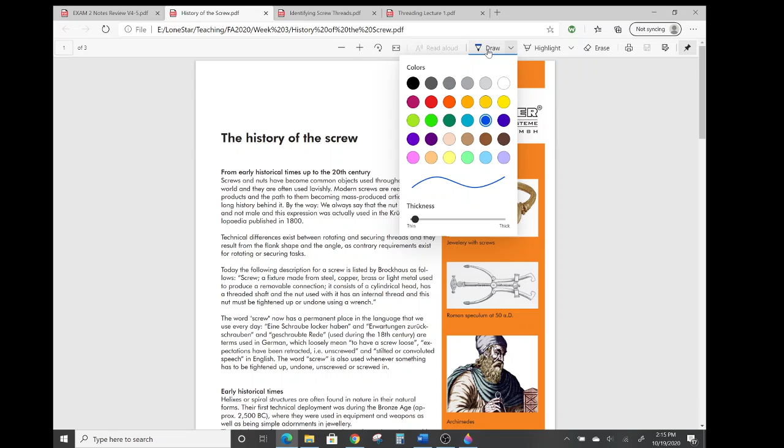Alright, so the history of the screw. The history of the screw. So I get my cursor over here, and as always we're going to want to draw on this, and I'll use red unless somebody starts complaining about red.

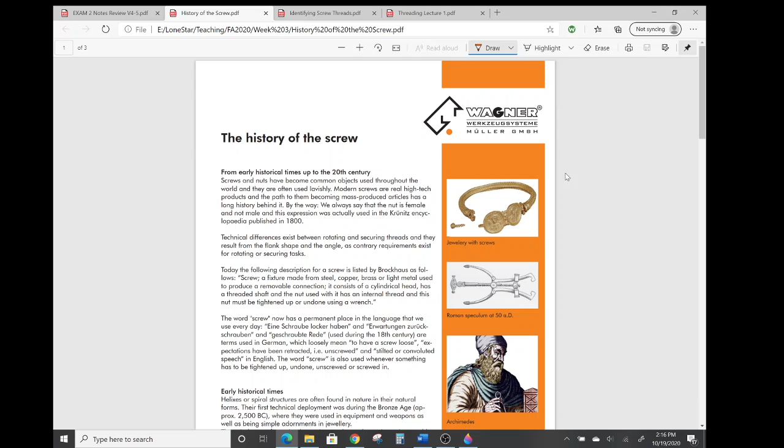Alright, from the early historical times to the 20th century, screws have been around for a long time. Here's some examples. Here's some ancient jewelry.

This is a Roman speculum. It was a medical device. Still use speculums today. Gynecologists use them. OBGYNs used to yank the babies out with a speculum. I don't think they use those anymore.

But this was one from the Roman time of 50 AD. The word cesarean section comes from Caesar, from ancient Rome, where they would open up the belly of a pregnant woman who was having trouble getting the child through the birth canal, and they didn't have a lot of anesthesia back then. So imagine that was an interesting trip. And you could bite down on a piece of leather or a stick or something.

But anyway, here's Archimedes. Now Archimedes is, he did a lot of work with screws. Archimedes is like Euclid. The Archimedean screw. Here's a screw pump right here. We use screw pumps still today.

When I was a civil engineer, I installed and designed a lot of screw pumps for lifting large volumes of water over a short distance in height. The Texas City Dike used to have huge screw pumps to take the storm water from one side of the dike and throw it over into the bay.

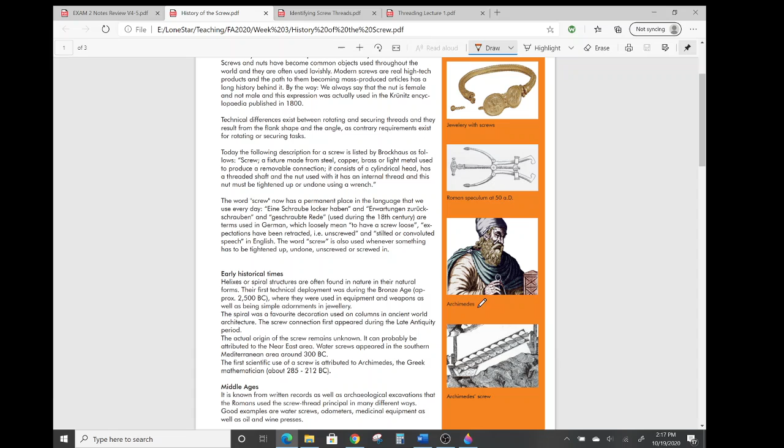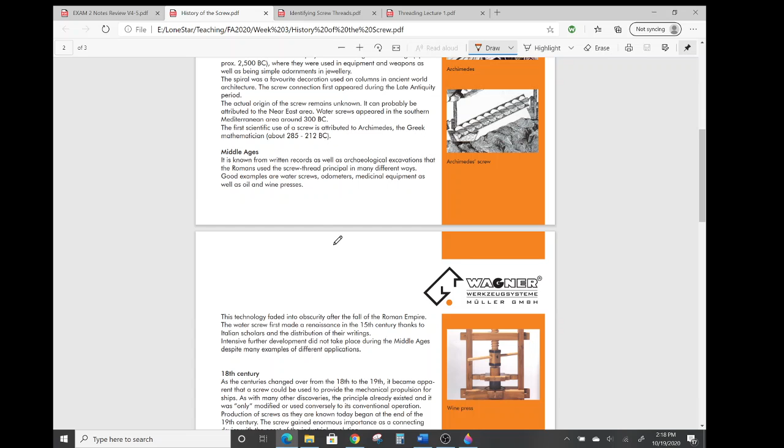The term screw is used for all kinds of stuff. You know, the term to screw up something is to mess it up, or you need to screw it down, tighten it up, or just the common term for screw is an equation to coitus or something. So anyway, we'll be talking about the mechanical aspect of the screw.

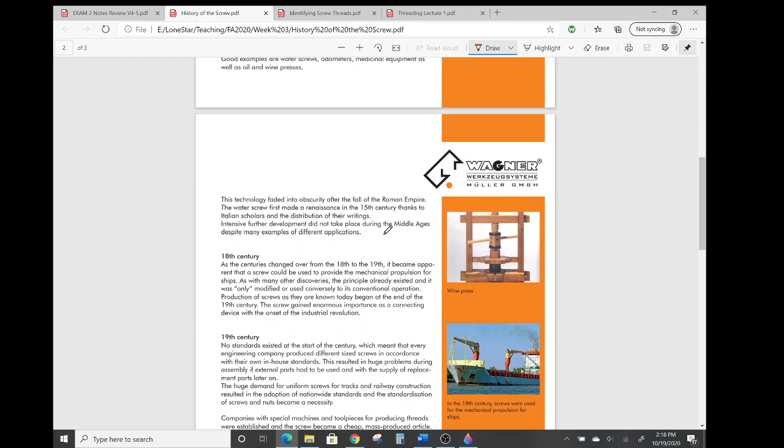Here is a wine press that has a screw. The Spaniards and the Turks had an execution chair that used a screw that would strap your head to the chair and your body to the chair, and then they would take a giant screw and break your neck as you're sitting upright. I think one of the James Bond movies had that execution chair in it, and the movie The Original Sin with Banderas and Angelina Jolie. Anyway, I digress.

So the screw's been around for a long, long time. The standard for screws you'll find in Machinery's Handbook. I'm not gonna do a lot of screwing math. Screwing math. Boy, that didn't sound good, did it?

We'll be talking about leads of screws, and that'll be on the exam too. Other than that, you'll get the rest of your screw mathematics and how to read Machinery's Handbook in your machine shop classes, or you should.

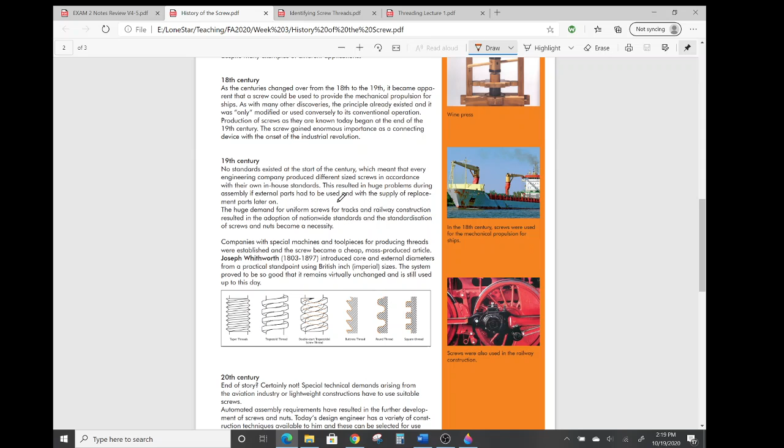So we're going to get some basic vocabulary. Now, Whitworth was an engineer who designed the Whitworth screw in the 1803 and 1897, somewhere in this period here.

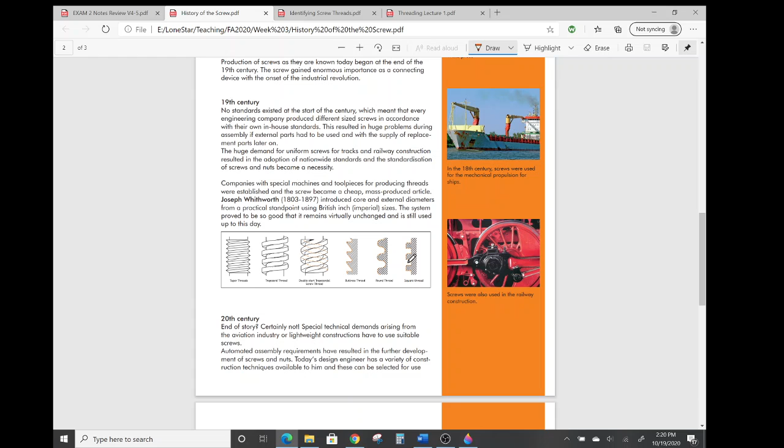You can blow this up and you'll see this is a trapezoidal thread, a taper thread, double start. A buttress thread is supposed to be self-locking like in a jack. Round thread, you see these, and ball screws in our CNC machines, and a square thread. There are all kinds of threads. Many manufacturers, NOV, Halliburton, they have proprietary threads.

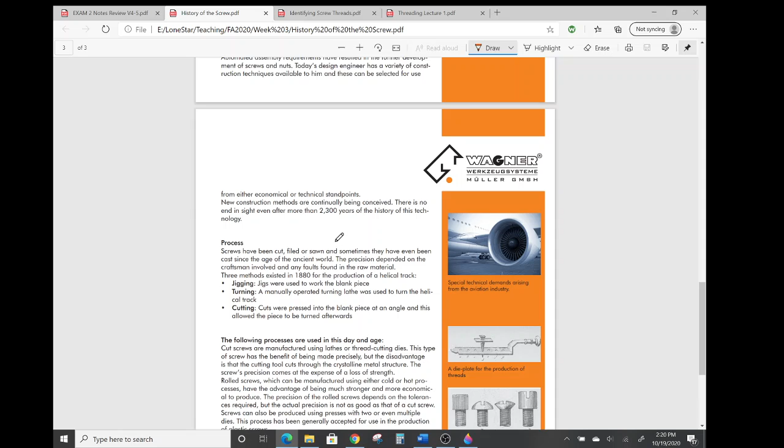So we move on into the 20th century. Basically the fan turbine inside a jet engine essentially is a threading deal.

A die plate for the production of threads. This is from ancient days of yore. Like I said, I'll be putting some videos up that you can watch on how things are made. I'll try to locate them. Here's a turning lathe that has a threading attachment, a screw manufacturing attachment to it.

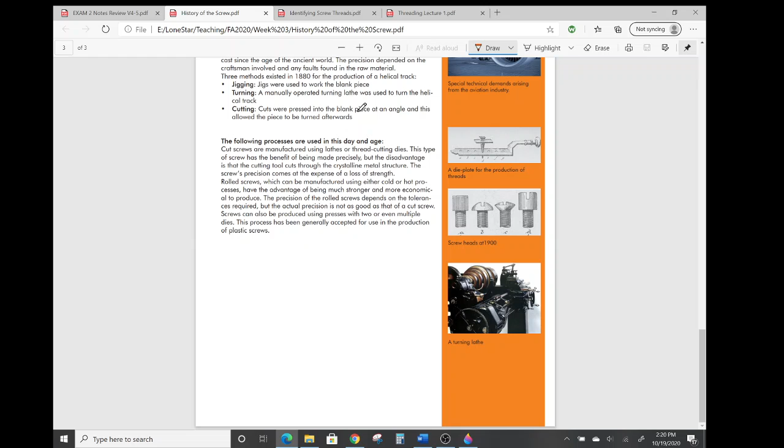Now let's go over here to identifying screw threads. This was a large paper, and I didn't put it all up here. Here are some common thread forms. These are not all of them. You could spend your whole life being a threading engineer, a threading specialist.

Here's a worm screw, worm drive. It's like a 40-degree angle. A stub acme is less than 30, so it's 29 degrees. An acme thread is 29 degrees.

Here's a ball, full radius ball, like you might find in a CNC machine or a linear motor. Here's an offset so that the ball doesn't make full contact. The ball would make full contact in here, and it would not in here. And this is the ISO metric trapezoidal thread.

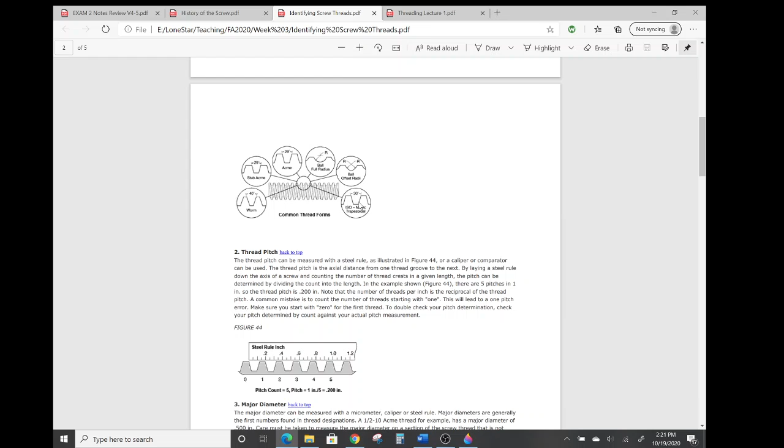Now these are just some, these are not all of them. What the ball threading does is it eliminates the backlash as much as we possibly can.

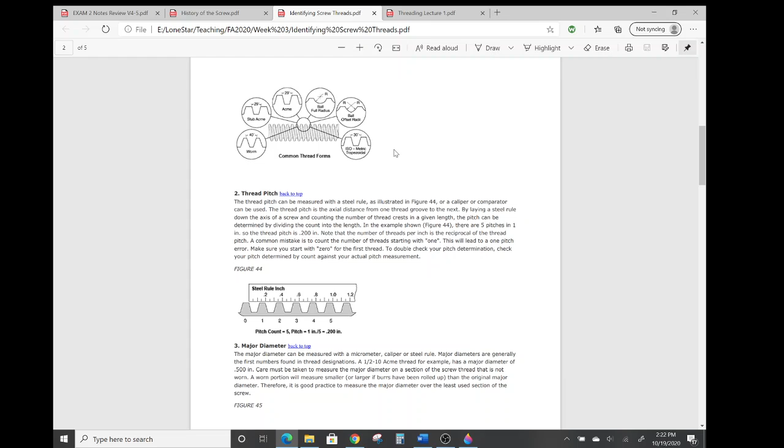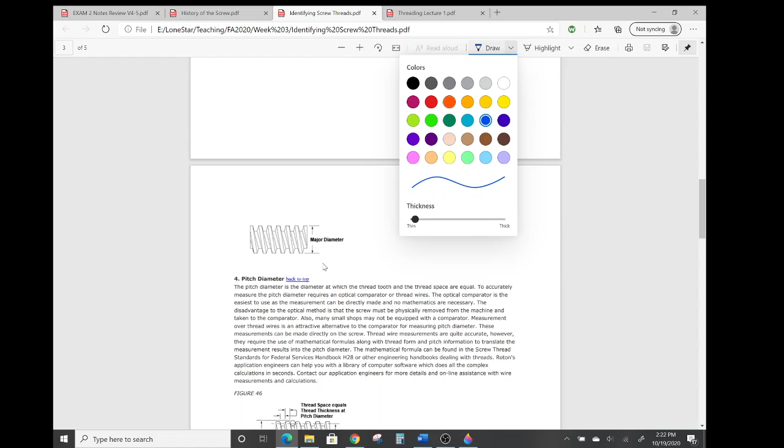So let's get into some terms. You've got the major diameter, the major diameter of an external thread. Now an external thread in Machinery's Handbook is noted by a letter... Okay, external thread is designated by an A thread.

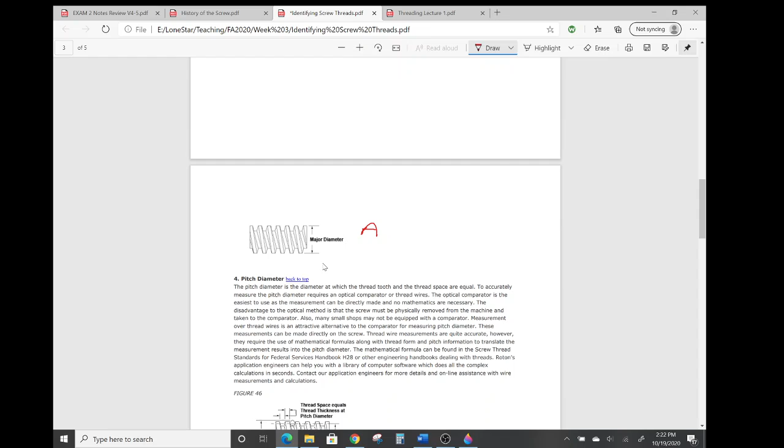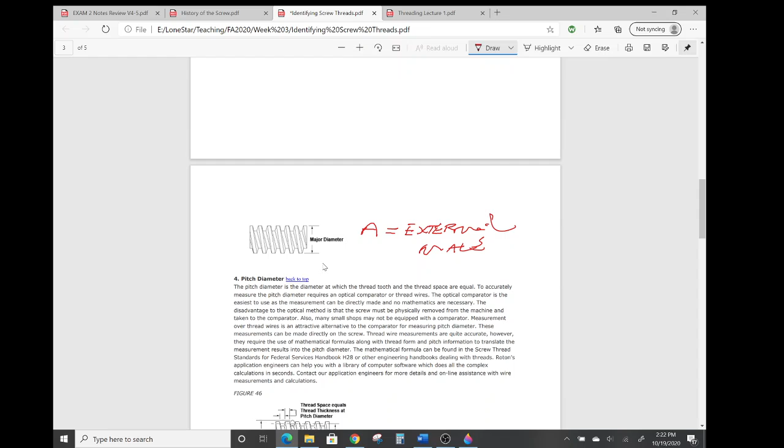Now this is not ISO, this is not in metric land. A is external, or a male thread. It's easy enough: an external thread or a male thread is A, because it's exposed to the air, it's outside, you can see the threads. A for air. Here's the major diameter.

It's measured from the top of the threads, the crest of the threads. The top of that threading is called the crest. Down here's the root.

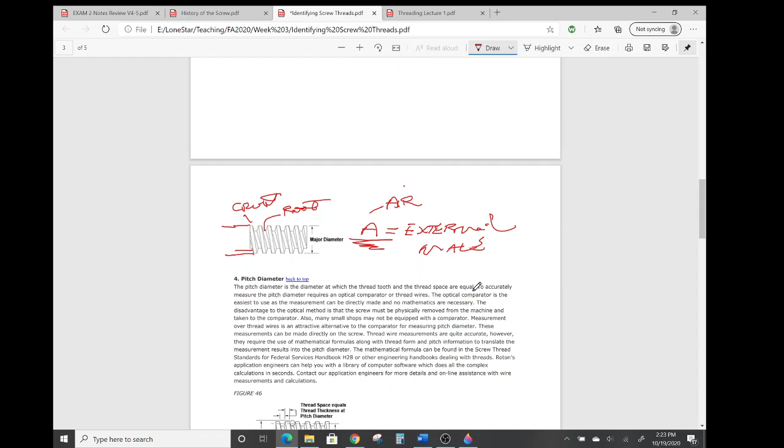Now, pitch diameter. When we're measuring threads, we really like to measure for the pitch diameter. Let's see if we can make this bigger... All right, the pitch diameter is not the crest or the root. Here's the root on an external thread, that would be the root, and this would be the crest.

The pitch diameter is an imaginary point halfway between the crest and the root. And that's really what we're measuring, the pitch diameter.

In Machinery's Handbook, when you get there in your machine shop classes, you'll see that the pitch diameter for an A thread will be a little different versus an internal thread, or B. Now B for an internal thread, you can think of it as bore, it's a thread inside a hole. So A is for air, external, and B is for bore, internal.

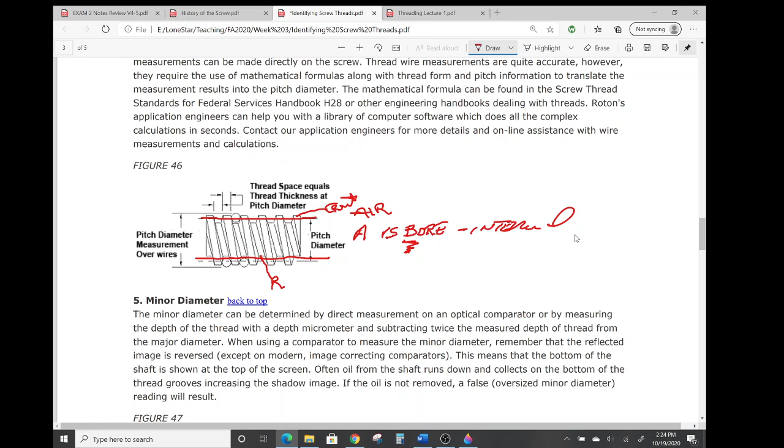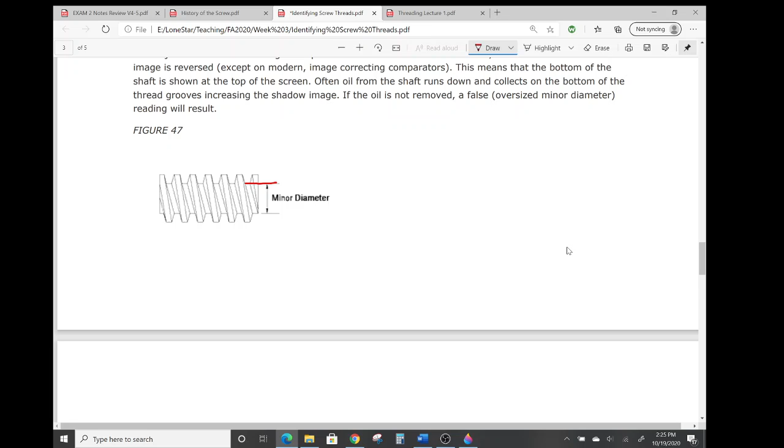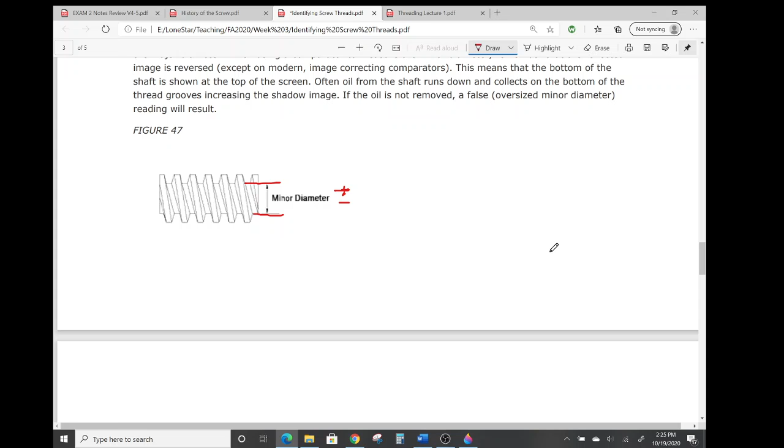The minor diameter—the major diameter is measured at the crest, the minor diameter is measured at the root. And these all have pluses or minuses, we call it tolerance, based on the type of thread and whether it's a 2A, 3A, or 1A thread. 1 is the loosest, 2 is your normal threading, and 3 would be your tightest tolerance of any of the threads, whether it's an A or a B thread.

The hand of the thread, whether it's a right-hand thread or a left-hand thread, is easy to determine by visual inspection. Simply compare your screw threads with the right hand and left hand threads illustrated down here. Most threads are right hand, and right hand is assumed if no left hand designation is specified. Just like if I tell you to cut a thread and I don't tell you it's a 3A or a 1A, the assumption is it would be a 2A thread. And unless I tell you otherwise, it's also going to be right hand.

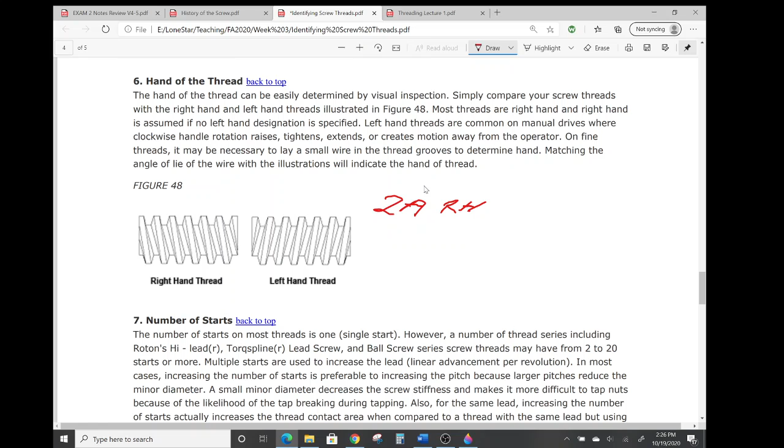Now for my gun barrels, I am as tight as I can get. I want a 3A thread for the shank of that barrel. We'll have the bore through here. And so the threads along in here, I'm going to cut at a 3A to match the female thread I've got to meet up to, which is the action, which has the threading in here.

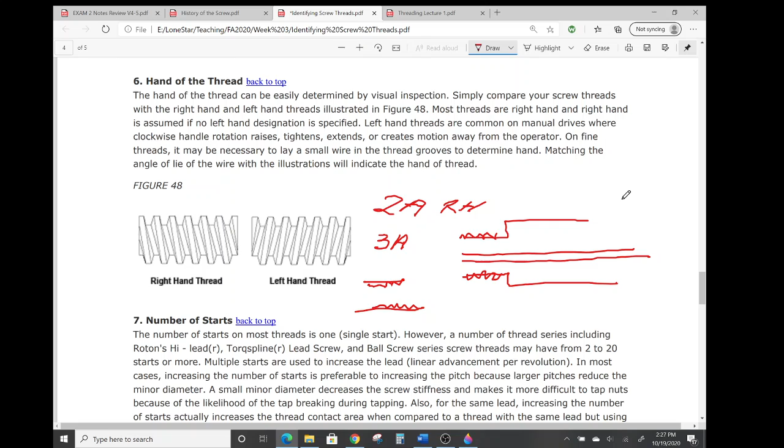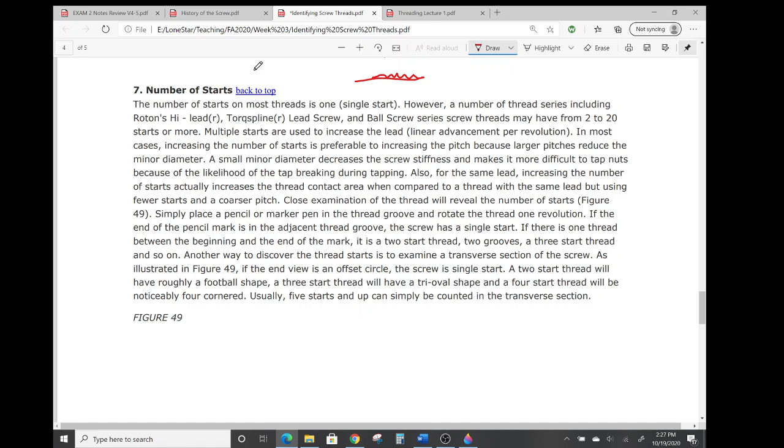Okay. All right. The number of starts of your thread will depend on if it's a 1 start, a 2 start, a 3 start, or a 4 start thread. And that will be on your next exam, exam number 2. And it'll be real simple. I'll give you the equation. So you need to read this.

A 1 start thread is your normal thread. If you just go to a hardware store and you buy a bolt, it's going to be a single start. It will be a single start thread.

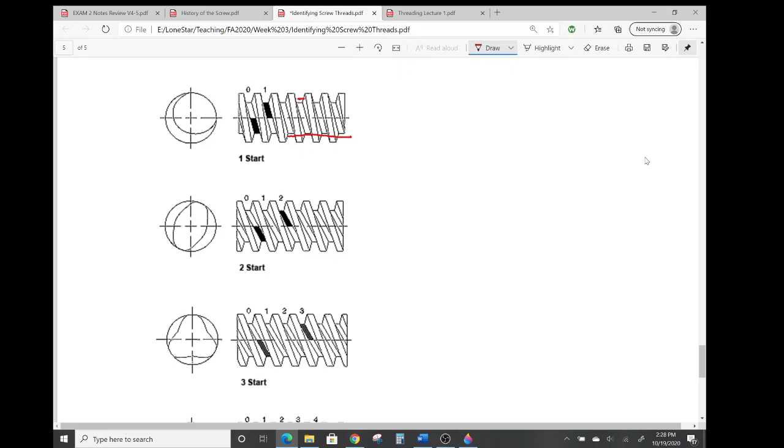Now we talked about the pitch diameter. The pitch diameter, the imaginary circle across here. The imaginary circle, halfway between the root and the crest. That's the pitch diameter. But the pitch of a thread is measured, it's the distance.

Oh my God, that's horrible. Woo, that's terrible.

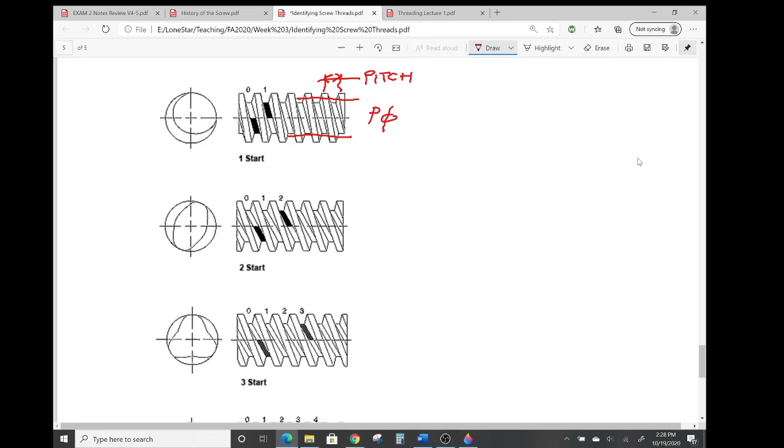The pitch is the distance between two of the crests. That's the pitch. That's with a P. So now if you go to the hardware store, the guy or the gal working at the hardware store says, well, what pitch do you want? Well, you're really not asking for pitch, you're asking for TPI, threads per inch. And this is where people get this all mixed up, threads per inch.

Now in metric land, we don't have inches, so metric threads are determined by the pitch, but here you might want, let's say a 3/8 by, I don't know, we'll say a 14 TPI. Now, that doesn't mean that the major diameter is 3/8 of an inch. That's the nominal 3/8. It's really going to be less.

You'd go into Machinery's Handbook and find the max and min of the major diameter for a 3/8 thread. All right, but that's the nominal. The threads per inch is if we measured 1 inch along here. Then theoretically we would have 14 threads. Now there's a relationship for pitch. Pitch is 1 over the TPI.

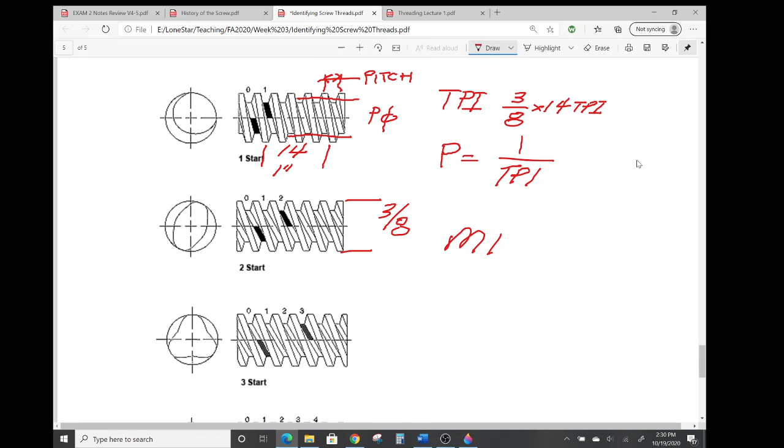Now if this was a metric thread, let's say an M10, that means the nominal diameter is 10 millimeters, and then the next one might be, let's say 1.05. That may not even exist in metric land, but let's just say it does. This is the pitch. Whereas in this case, this is the TPI. You could spend a whole semester discussing threads and threading engineering. All right.

So if it was metric, it would be like an M10, and then your next number would be the pitch. And of course, the pitches have to match the male and female, or they won't go together, right? So the pitch is 1 over the TPI, unless it's metric and you are given the pitch. All right, let's move on.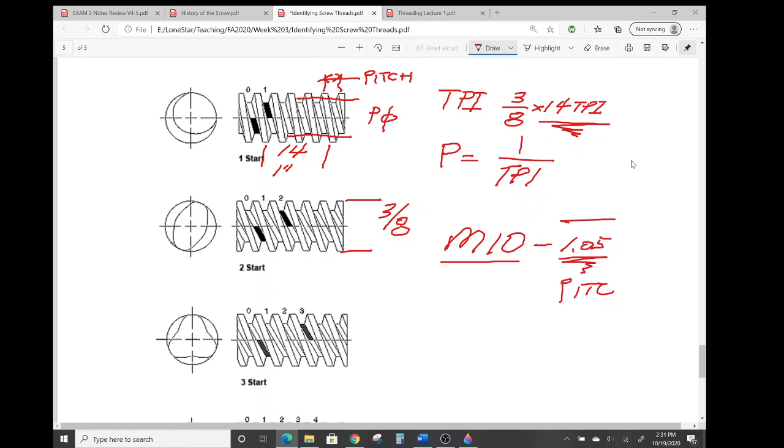And these 1 starts, 2 starts, 3 starts, and 4 starts mean something to us. It means how far each one of these will travel. In other words, if we did 1 full 360-degree rotation, how far would it travel from point A to point B? That's called the lead. How far a threaded device will travel, whether it's a nut or a bolt, male or female, in 1 rotation. That's the lead. Okay?

For a 1 start thread, the lead is 1 times the pitch.

From now on, I'm just going to use P for pitch. Or it's 1 times 1 over the TPI. And you know how to multiply these fractions by now. If it's a 2 start, in other words, when we cut 1 set of threads and we go to the second, we rotate the spindle on the lathe 180 degrees and start cutting threads again. You're cutting a thread in between the threads. A 3 start thread would be where we rotated a third, and a 4th is a quarter of the full circle. So a 2 start thread, the lead, how far it travels in 1 rotation, is 2 times the pitch, or 2 times 1 over the TPI.

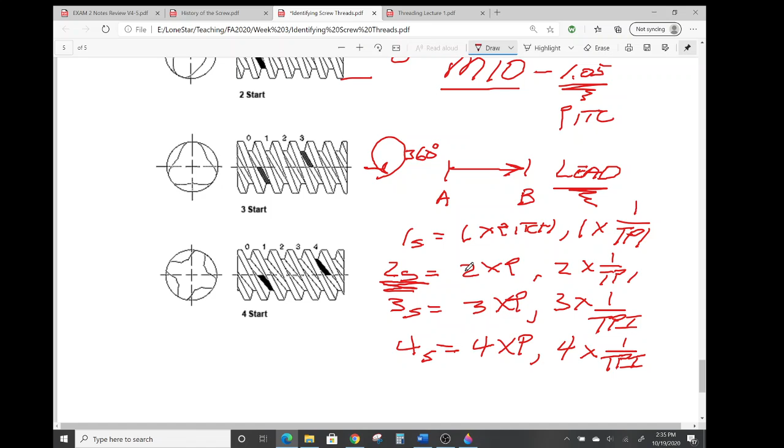We'll go through that during the review, and you'll see how that works. Now, there's a trick question in there where it'll say if it's a 2-start thread and we rotate it twice, how far will it travel? Well, you start off with 2 times the pitch times 2, right? Because it rotated twice. Some people catch that. Some people fall into the trap. So, all right.

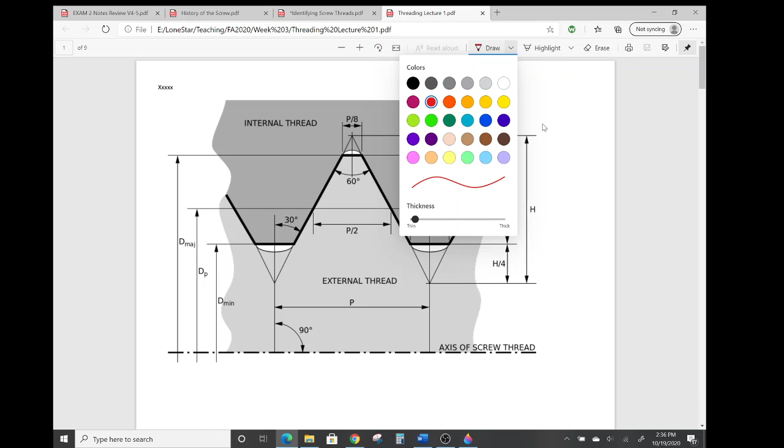So let's look at another example of a thread. This is an internal thread or a female thread or a B. You know, after a couple of 100 years, I might actually get this down right? Okay, each one of these I've got to start the pen. So this is an internal thread, or it's a B for bore, right? This is an external thread, or A, because the threads are exposed to the air. You can see them without having to peek through the hole. So it's male, this is female, this is an A, this is a B.

This would be a typical 60-degree thread, V thread. They don't all come exactly to a point. They shouldn't. And there's got to be some space in here. So when you get into your actual machining and you start looking in Machinery's Handbook at the threading tables, I used to spend a lot of time on that, but you're not being tested on that, so I'm not going to waste your time right now. You'll see that each one of these has a max min. The root has a max min. The pitch diameter has a max min. So you can be within tolerance. And same with the external and internal threading.

Now there's got to be some space in here, and this space allows these two things to mesh up. And not all these faces touch. If this is going this direction, then only these faces are going to push. They'll be pushing on the nut, or vice versa. So there's some gap in there. And we call that gap backlash. So in a manual machine, if you're sending the carriage or the tool in one direction and you want to reverse and you start cranking on the handle, that handle's going to move some slight amount before the tool or the part starts moving back. That's called backlash. And you have to account for that. You'll learn that in your manual machining class.

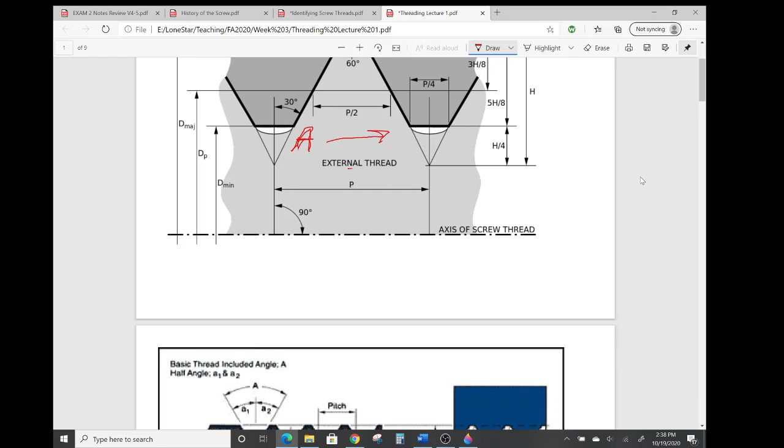Or at least I hope you do. That's why you cannot rely on the calibrated handle on a manual machine. You need to watch that DRO or set up dial indicators on your machine.

Now here's an example of how some people measure the pitch, and I don't like this, because getting down in here and finding that imaginary point is ludicrous. To me, if you're going to measure the pitch, you really need to be from crest to crest. You'll get a better chance of finding this. But that's really not what you're worried about. You're worried about measuring across the pitch diameter. And we'll see that in a minute.

So, you'll see where on the internal, this is B, remember, B. This would be your A thread. All right, external, male, A, internal, female. You'll see that the major diameter is at the root on the female, whereas the major diameter on the male is at the crest. Well, that just makes sense, doesn't it?

Of course it does. And then the minor diameter for a male or an external thread is at the root, whereas the minor, smallest diameter in a female is going to be at the crest inside there. And the difference in the spacing of these things is so that they can fit, they can screw in, because they've got to be the same pitch, right?

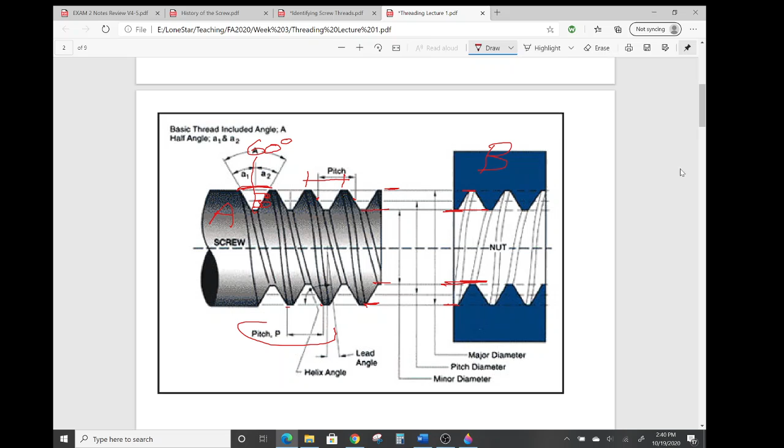Excuse me. My goodness, allergies are killing me.

Here's an example of the lead and the pitch. It doesn't matter what the lead is, the pitch is the same. The pitch is the distance between two threads. No matter what, single start or double start, it's still the distance between two threads. The thing with a double start is you got an extra set of threads in here. And here's a triple start, a three start. There's the pitch measure, okay?

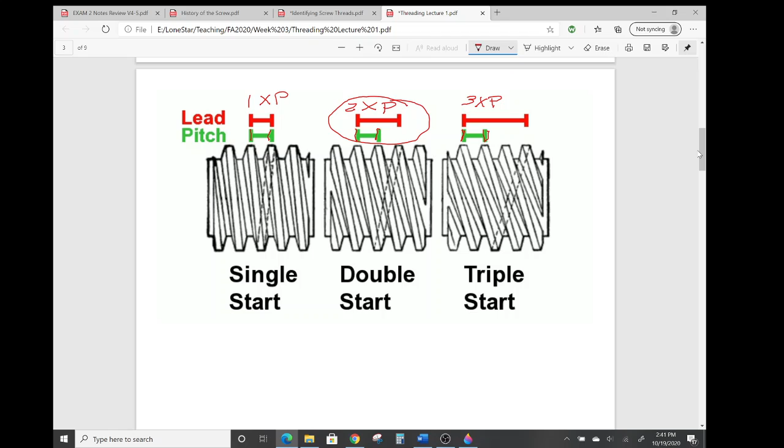But remember, the lead for a single start is 1 times the pitch. It equals the pitch for a single start. For a double start, it's 2 times the pitch. And then for a triple start, it's 3 times the pitch. This is 2 times the pitch. And this is 1 times the pitch. So it equals the pitch for a 1 start. Okay?

Now, how do we measure these things? There's 2 ways to measure your threads when you get it done. You could use a gauge. You don't want to use the nut for the bolt. You want to use a certified gauge because there's some tolerances. The easiest thing to do is use, well, it's not the easiest thing. I had to use 3 wires for years because I couldn't afford a thread micrometer. Now I'm old enough and my kids are all gone, so I can afford a good thread micrometer, but I used a 3-wire method. And here's some formulas for a 3-wire method.

Your wire sets come with your wires, and there's a formula in each wire set that tells you what the distance over the wires is depending on the thread you're cutting, and you'll get your desired pitch diameter from Machinery's Handbook for the particular size of thread, the number of TPI, and the class of thread, whether it's a 2 or 3 or 1, and what you want to hit.

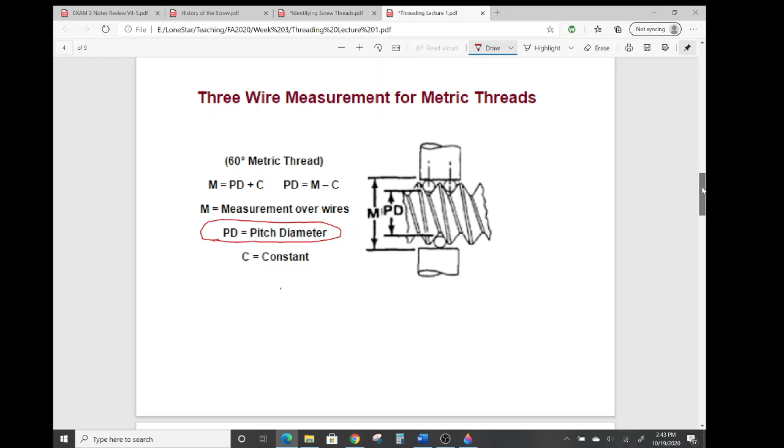Normally you would drop these threads, one of these wires, in your machine and try to dig it out. If you lose one of these, you might as well just go replace the set. The 3-wire sets are not that expensive, I think the most expensive ones are around $20. But if you lose one of these wires, throw the whole set away and try not to do it again. Or use Play-Doh to hold the 3 wires together up here at the top, or a wine cork or something like that.

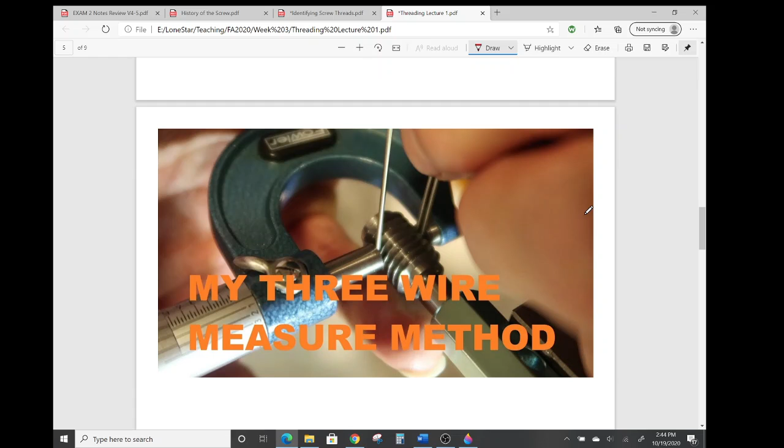Now, happy land. This is a thread micrometer. So it is specifically measured. Here's the spindle, here's the anvil. Anvil. Spindle.

And it's measuring the pitch diameter. So depending on the TPI range, my set has removable spindles and anvils. Depending on the TPI range, I pick the right spindle and the right anvil, set it in the micrometer, set it to 0, and I measure directly my pitch diameter. Happy days now, no more dropping 3 wires. And I get a direct read.

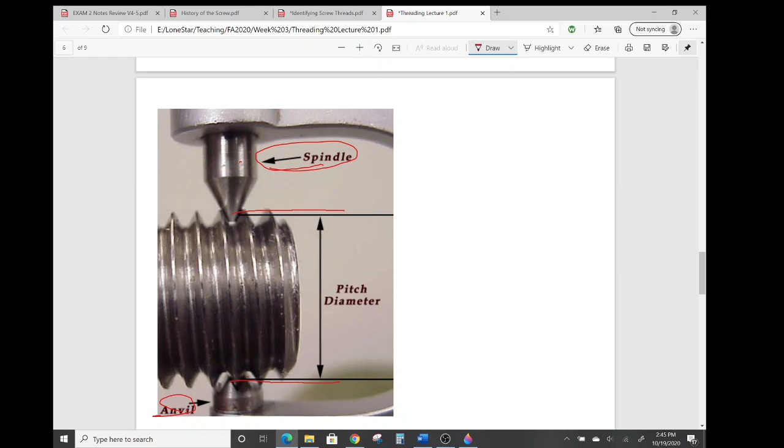You will have fun in machine shop doing this.

Now, we talked about backlash. The distance between the male part and the female part, the A and the B, there has to be some space in there or they won't go together. And how much slop there is changing directions with that screw, it's not an instantaneous deal. It's a backlash. And managing backlash on a manual machine separates the experienced from the wannabe experienced.

Now, in CNC machines, those things can hold their tolerances to 5 decimal places or more and do it at light speed, going back and forth. So what do they do? Well, it's quite simple, they use ball screws. So the female part, this would be the B, threads and the A threads, they don't touch each other. What fills up that space are these ball bearings.

Now this is a small linear motor. And on big machines, these ball bearings go out, go through an oil bath, a coolant bath, and come back in. So this is what's actually doing the driving.

So we saw on one of the other PDFs, you had 2 types of radiuses, right? You had, well, that's nasty, that's a full radius. So the full ball bearing would fit in there. And then you had one that had 2 radiuses, more like this, sort of. So the ball bearing would rest on the sides and not fully in contact with the base. So there are advantages and disadvantages of these.

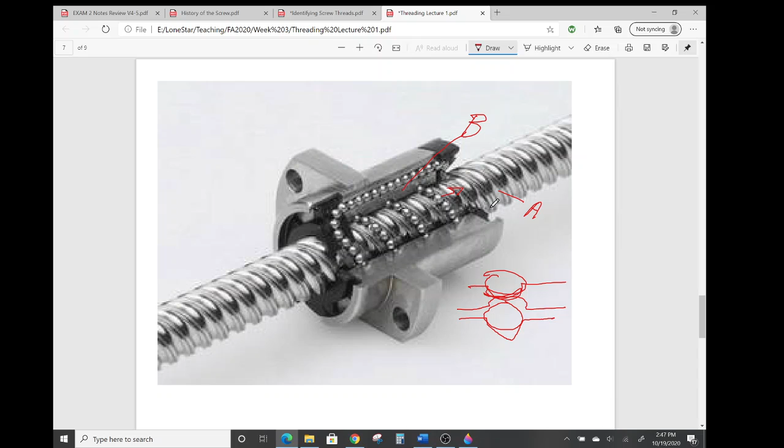And that's what the mechanical engineers agonize over. But that's how a CNC machine takes care of its backlash. And of course, there will eventually be a time when these things wear out, no matter how good your lubrication is, and you've got to replace these, and they're very, very expensive. There are some companies that do aftermarket conversions for manual machines to put ball screws in, especially your small home shop model mini mills and stuff like that.

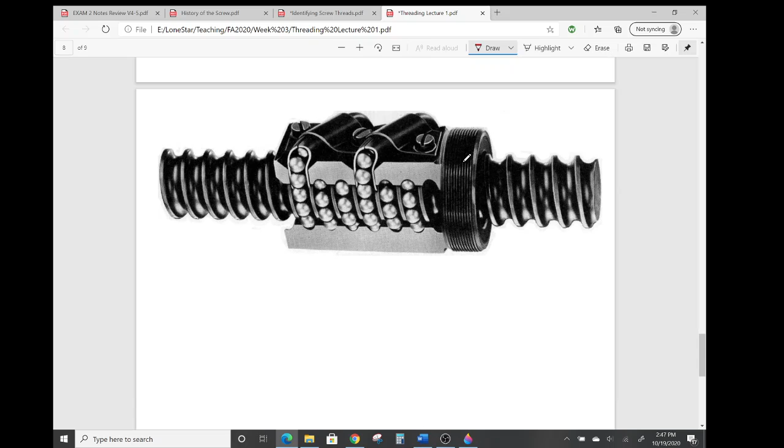Here's another picture of a ball screw. This is obviously a light one, just for a small linear motor. You can see how the ball bearings fit inside the entire race and how they fit in here. These will be lubricated, of course, to dissipate the heat. Bigger machines, these ball bearings will actually come out and go through a forced oil bath and then back in here.

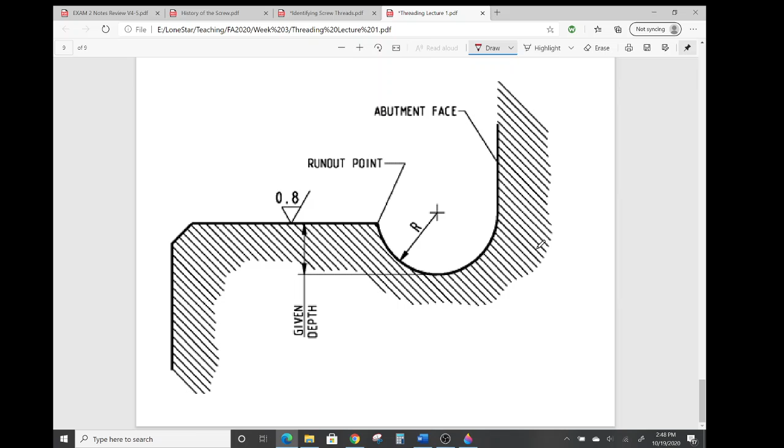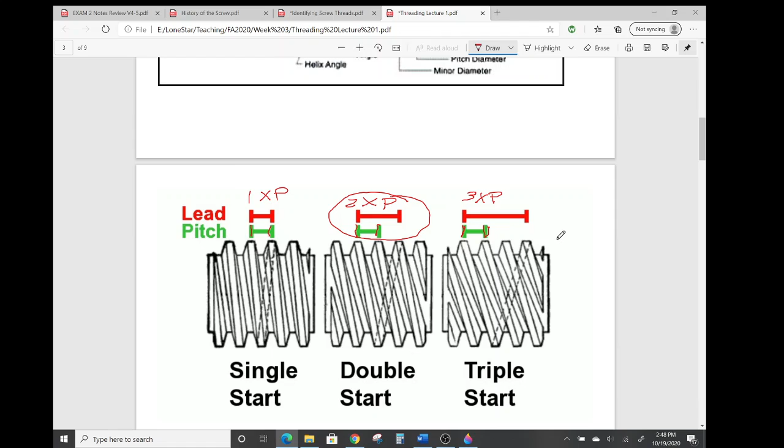Now that's a better picture of the race. All right, so anyhow, that kind of gives you an overview of the screw and the lead. The important thing for the next exam will be understanding the relationship between the pitch and the TPI. It's a very simple problem, as long as you keep your head about you, and should not be a problem. All right, so that's kind of an overview.

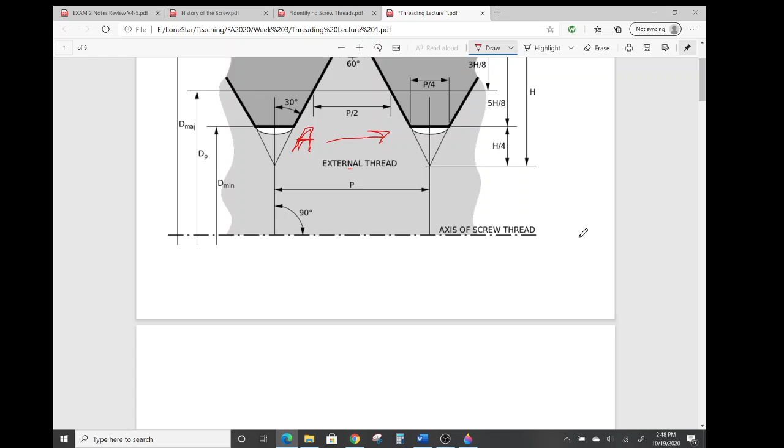Like I say, I'm not going to spend a lot of time in Machinery's Handbook because we're not able to go to the lab and actually look at it in person. I could give a whole week-long lecture on threading for different rifle barrels and how you do it. The bottom line is, if you're lucky enough to get a job in a repair shop where every day is something new and different, you'll probably have a female part being brought to you, and you're going to be asked to mate up the male part to it.

You could go to Machinery's Handbook and do everything just right, and it still may not fit right, because the female part may be on the high side or the low side of its tolerance. The simplest thing to do, if you're tasked with making the male part, is go measure the female part and take some aluminum and start test cutting some plugs to see which fits best.

Then you'll get an idea of how you're going to cut your male part. So like most things in life, we let the female govern, especially in rifle building. The female part is the action, so we measure that, and then we cut the barrel shank to fit the action. That happens a lot in industry too—they'll bring in an old pump, and you rethread a male part to go into the female part, and that's just what you do.

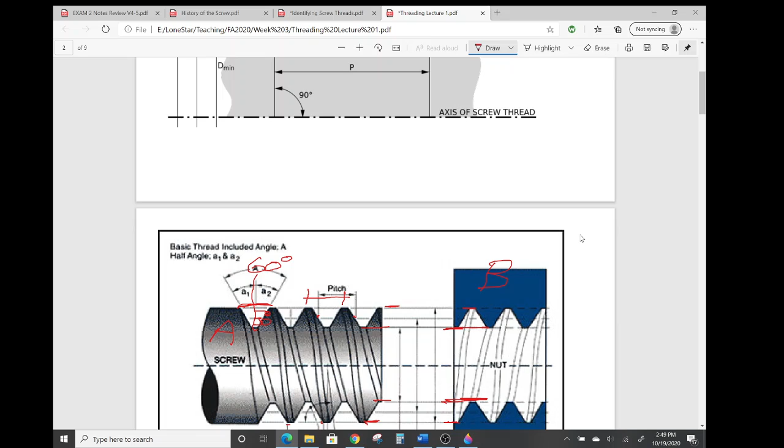So I hope this helps, gives you some idea and some vocabulary between the three PDFs that I threw up here.

Now the exam part of threading. Let me pull up the exam notes. So there'll be a drawing on the exam with many different holes, A through maybe G or so, and we'll want, number one, the full threads—we'll go through this.

The TPI and the distance traveled in one rotation—that would be the lead.

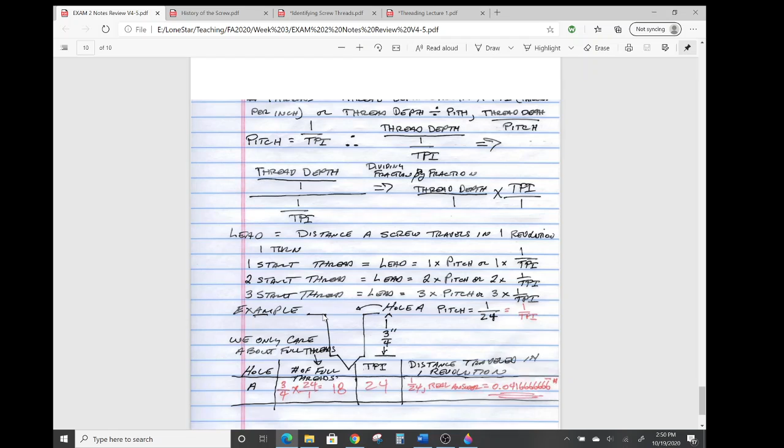The number of full threads is going to be one of two formulas. We'll go over this again in the review video for the exam. The number of threads equals the thread depth, or length of the thread. If it's a threaded hole, it'd be the depth times the TPI of the thread. Or it's the thread depth divided by the pitch.

If the pitch equals 1 over the TPI, then it's the thread depth divided by the pitch, which is 1 over the TPI. You're dividing a fraction by a fraction, right? So you turn this upside down.

Let me go back to drawing this out. So it's thread depth over 1. Let's say it's 3/4 of an inch—it's 3/4 divided by this. Then you flip this upside down and multiply, so it'd be thread depth times the TPI, which is 1 over TPI. So it's still TPI times the thread depth. We'll go back over this part as we go through it.

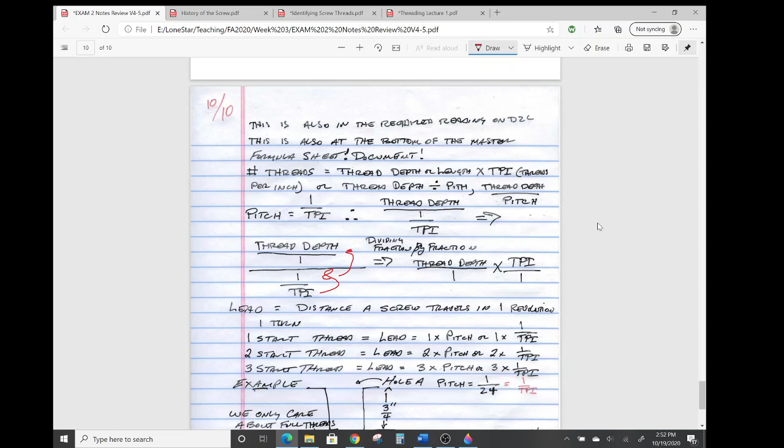So let's say we have 3/4 of an inch, and we want as many threads as we can get—we want to know the number of threads in that hole. So it'd be 3/4 times, and let's say the pitch is 1 over 24, which means the TPI is 24, so that's 3/4 times 24. That means we get an even number of 18 threads in that 3/4 inch hole if the TPI is 24 threads per inch.

Now, some of these answers would be like maybe 18.8. Well, we don't care about the 0.8—only in this problem will we never round, never, never, never round. Only in this kind of problem. So the answer would be 18, because we don't care about the 0.8 threads—we only care about the full even number of threads, which would be 18. Again, we will go over this again.

And if it was a pitch of 1 over 24 and it's a single start thread, then the distance it travels in one rotation is 1 over 24 of an inch, or the real answer is 0.0416666666666—the number that my ex-wife thinks is tattooed on the back of my head, 666.